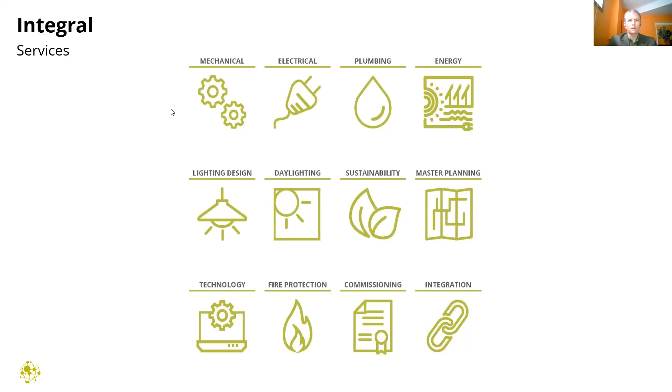In a minute, Bilal's going to share a piece of important research that we uncovered, and there's actually a few hidden messages in this. So I'll put this one up and give you maybe 20-30 seconds to read this next graph and see if any questions arise from this.

So what you'll see from here, this is a good case study. We've got an independent reference, I'm doing my good practice, I've got my scales, my X and Y. And who can spot a problem with this here?

Clearly, they haven't calibrated the number of pirates that are leading to the change in global average temperature. So clearly, this information cannot be trusted. So you all spotted that.

Pirates, yeah. I like to put this one up because I came across this by accident. If you are bored at home and need a break, these are the guys behind the spaghetti monster and the religion called the Pastafarians, isn't it, Bilal? Interesting name. These guys believe that the world was created by the flying spaghetti monster, and as Pastafarians they have the right, as part of their religion, to wear colanders on their heads. So he just put this up as a bit of a spoof.

But the reason I like this one is because when you're trying to promote a green building, you will find a mountain of suppliers telling you that their solution will give you a green building. They say, if you put this pump into your building, it will make it greener, more efficient. You need to be very wary of the data. Sometimes information comes through with no scales on it, sometimes it's not referenced. So it's just a warning that you need to be fairly cynical of the data. Obviously, you want to check you're all awake.

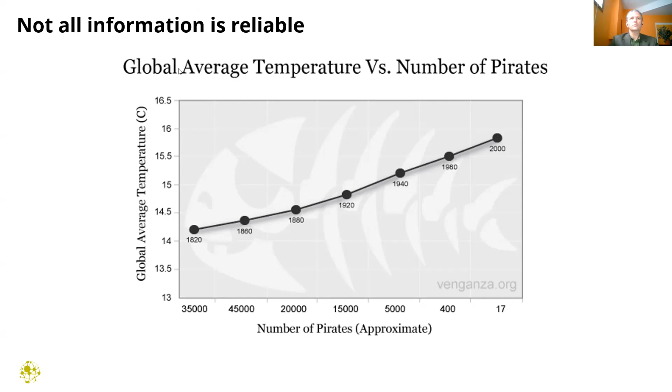Okay, I'll let you just soak this one in for a second. What we wanted to do with this rather busy table is just highlight 3 of the main ways we're seeing of defining net zero. When you're starting out on a net zero project of any type, the first question I'd recommend you ask is, what version of net zero would you like? The 3 we're seeing coming in as most prevalent at the moment in the Alberta market: one is the CaGBC, who have their own zero carbon standard.

And they've just released, I think, Bilal, version 2 - is that correct? That is true, just at the beginning of this year. So there again, if this is what your client says they want, you need to say, okay, well, we're now just into version 2. This is obviously the same people that brought you LEED, and they've done a really good job of presenting something that's pretty clear and very well defined, but also I'd say it's kind of the market-friendly version of net zero.

The 2 things I'll highlight for you are 3 and 4, if you're not familiar with this. Number 3, which is surprising when you first look at it, is it recognizes that you only need to meet this certification as a third-party certification of 5% of the modeled annual energy. There's a version for existing buildings as well. The second one, which is quite a challenging target, is the TEDI. If you're not familiar with TEDI, which I'm sure you are, that's something to wrap your head around. The TEDI target for most of our climate zones is in that 34 to 36 range, so that requires a very significant envelope.

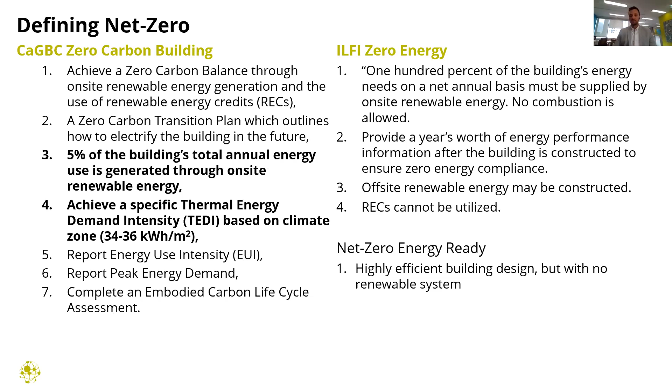So just looking at that, it will really depict where you spend your dollars when you're investing in a net zero building. So just to reiterate what Matt said, I think the designer and the owner should really be on the same page of what's happening and how that rating system should be achieved. I would jump to the next slide here.

Feel free, Matt, to explain that, but I guess we don't want to go into the depths of every single row here. The message is, just like the three different alternatives we showed in the previous slide, there are, across Canada at least, many other frameworks and pathways to different high performance standards, or sometimes authorities having jurisdiction requiring buildings to meet a specific performance, just like the BC Step Code and the Toronto Sustainability Guidelines, etc. So Matt, feel free to add a few words here as well.

Thanks, Bilal. This again is another rather busy slide, but that's really the intention of it. This is from the results of one of the studies we recently did for Alberta Infrastructure on achieving different versions of net zero. There's actually a bigger table with about double the number. Again, the message is make sure you know what your target is. And to reiterate what Bilal said, sometimes the devil is in the detail.

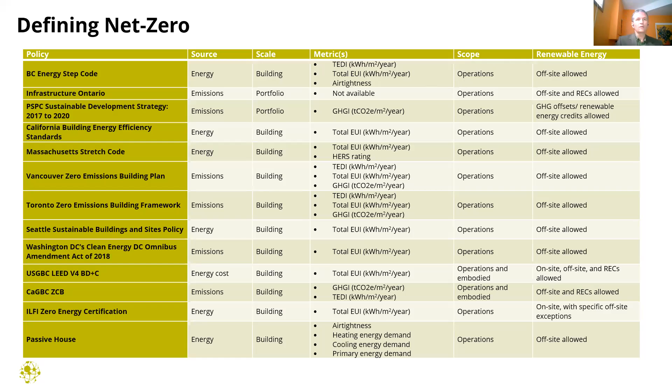What we have on the next slide is a graph produced by the International Panel on Climate Change, showing the potential greenhouse gas emissions reduction by different sector. You don't need to worry too much about the details of the different shades of blue, but a high proportion of people I talk to, even hardened building professionals, are very surprised that the building sector is the biggest—new buildings and existing buildings. So what this is telling us, if you look at this third graph, that's us, all in the building sector.

If we don't do something about our greenhouse gas mitigation potential, nothing else really matters. So if we brought transport down to zero and didn't do anything about buildings, we're going to be hooped. So if you're wondering why you're working so hard to try and deliver net zero buildings, this graph you can grab, we've got the reference there, I can send it to you. This is the graph you use to reassure yourself why you're having sleepless nights trying to deliver net zero buildings, and to reassure clients why it's so important that they do that.

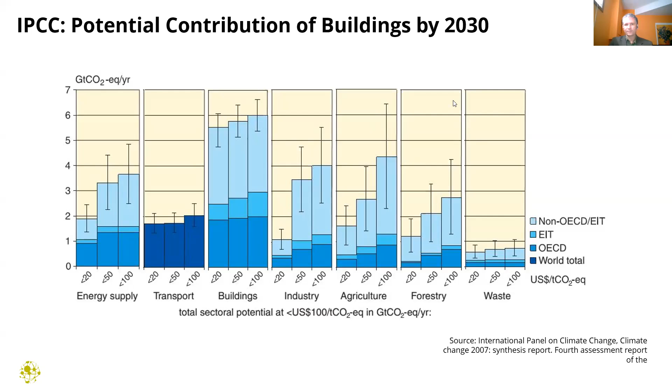I think that was all we had on that one, wasn't it, Bilal? That is true. And this one is a proper graph, no pirates on that one. Okay, off you go, awesome. Bilal. All right, thank you Matt. So no more pirates, promised, it's all serious from this point.

We've kind of defined what net zero is and why we need to achieve this, and the different schemes, or templates, that clients and developers can follow. But really, how do we do that? People are becoming more aware, more educated, but it's always good to remind ourselves of the exact steps to achieve net zero from the design side, or where do you invest your money first.

In any high performance project, even before we speak about net zero, fabric or the building envelope should always come first. And when we talk about building envelope, I would even stress something which is not insulation. Believe it or not, sometimes the shape of the building itself, how you size the mass of the building, how you orient it, and passive features you could add is essentially free money when you're trying to sell a service to a client. If I'm a developer, I would care first about the mass of the building before discussing insulation. So that goes on the left side of my screen right here.

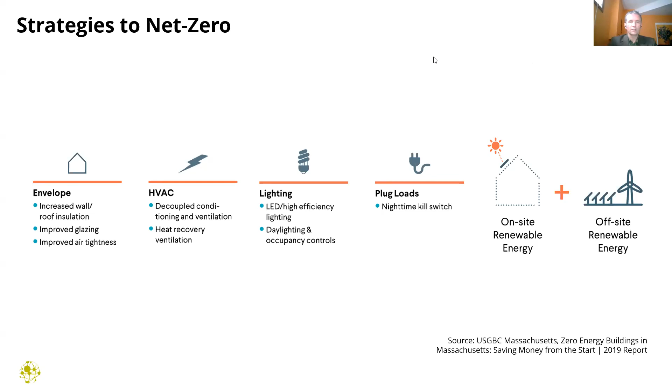One of the key things we're looking at with clients as they're re-entering the workspace is making sure they understand what the ventilation strategy is in each space and what it needs to be. When you're looking at one of the best measures for reducing that, in the second box you see there in terms of HVAC, is recirculation of air and the whole idea of the HRV. If you're the mechanical designer, you really need to be guaranteeing the client that you're not going to have any cross-contamination. So one of the things we're going to touch on is that as you reduce air leakage, you have less opportunity to dilute any potential contaminants or airborne particulates. So that's a really good question - we were going to touch on that later, but thank you.

Appreciate it, Daryl. Yeah, we'll touch on it. The next one, yes then?

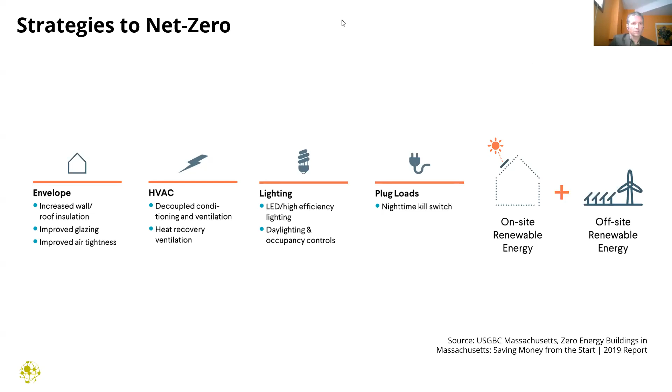I'll carry on and try to make this smooth and quick so we can jump to the other slides. Essentially what we're looking at on screen is a colorful illustration that has a point, and I want all of us to look at this from the left side to the right side. So currently today, at least in Canada, and it's very similar across the globe, there is some sort of building code that needs to be followed.

Part of that building code is an energy section, an energy jurisdiction calling for an energy requirement, or sometimes a jurisdiction calling for complying with LEED. I'm speaking about this across geographies around the world. What I'm trying to say is there is some sort of energy performance target that has to be addressed, or at least discussed, for every design. At least in Canada, we have the NECB 2017 in most provinces today, and 2015 in others.

To achieve this, designers and developers alike are seeing a bit of a change, and that is what we call thermal bridging. Today, thermal bridging design cannot just be a small Excel exercise like we used to do with the older edition of the code. Today we're engaging in much more structured conversations with the architect and sometimes the design-build team, looking at more tangible and actionable solutions to reduce thermal bridging. In case some of us don't know this, thermal bridging is essentially a bypass - if you have a very good envelope with a stud that holds the structure together, that stud is a bridge for heat to transfer from inside to outside, or the other way around, depending if you're in a cold or hot dominant climate.

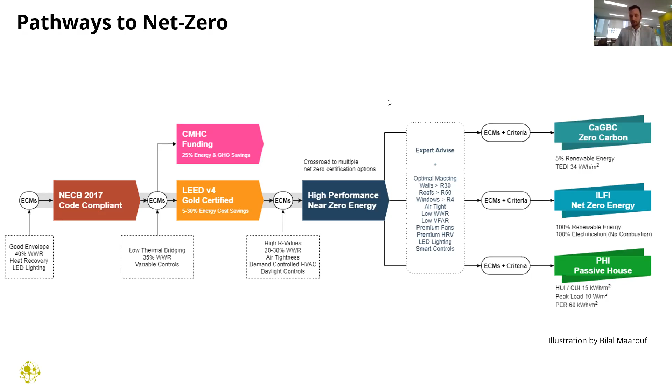I'm happy to take this offline in case anyone is interested to see more details on that, or I'll just wait for questions. I'm going to pause here for a minute in case people are typing.

I will just briefly go over the study we delivered last year. Let me briefly touch on these next two, just to make sure we finish on time and then see if there are any questions at the end, because we covered quite a lot in the last few slides.

All you need to know about this one is that it was a study Bilal did, where we were asked to model how you achieve two of these main different versions of net zero for different building archetypes. We went through and did actual models for all the different climate zones.

I think this is available online through Alberta Infrastructure, so we can circulate it. We won't necessarily go through every detail here, but maybe at the end if there's time. What we found is that we picked and chose different solutions for different building types and locations, and there is assistance out there—I believe it's still available on the Alberta Infrastructure website.

That's quite a big study. We want to show that there are suggested solutions out there, so we can get into the depth on some of the other ones.

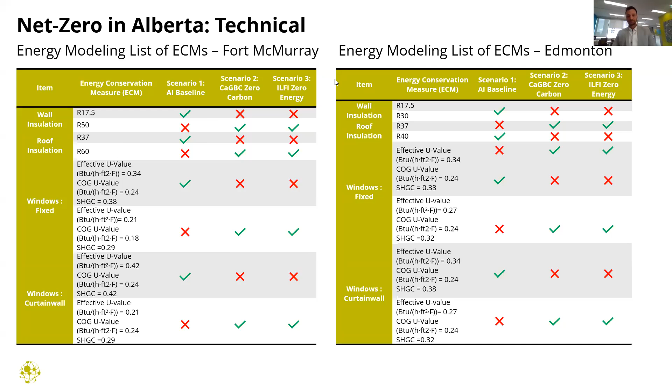Yeah, the next one we just want to illustrate—here's another example of something we did the mechanical, electrical, and energy modeling design on. It's a building in one of the coldest parts of Alberta, and it's Passive House certified—or Passive House Plus, yes, I think it's a Passive House Plus.

And this has achieved all these metrics that we're talking about, usually listed there, and it's really a groundbreaking building that we're very proud of. We can go into the details there.

So just to chip in quickly about the client, the town of Valley View: they were between two decisions. Option A, should we retrofit the building we currently have and make major renovations, or Option B, should we go with a complete new construction that is passive house and reduce our operation costs? When you look at the 30 to 35 year life cycle cost of the building, it made much more sense to pursue passive house. This was decided by the client, and I think it's a very interesting case study for all of us in Alberta to realize.

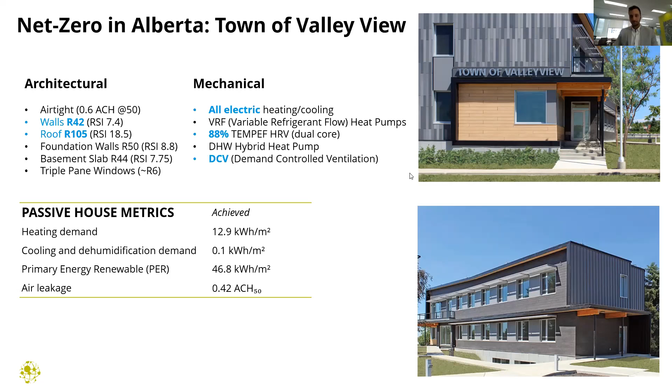But the message we want to convey is passive house doesn't really mean a lot of extra costs. We are looking at cost premiums in the Alberta climate zone, and when I say Alberta climate zone, it's a cold climate zone. Unlike British Columbia, our neighbors, where it might be a bit more cost affordable or have faster return on investment, in Alberta we're looking at a cost premium between 5 to 10%. And this can really be subjective based on the type of building, as Matt explained - is it residential, institutional, commercial - and what type of rating system you're pursuing, and what the financial model is. Is there financing happening, and is there something that could get economies of scale?

Payback period is about 20 to 25 years. So owners would need to know, are they owning the building across its life cycle, or are they selling it after 10 years? These are all the accounting and financial questions that need to be asked before we formulate the full business case of passive house. So I just want to end it there for courtesy of time, but we can address questions even offline after that.

2020, Matt? Did we skip the more detailed slide for the case study? Was there a slide before that last one? Yeah, that one. Did we skip that one? We did skip it, I think this one's in lieu of the other. I think this one's worth having a quick chat about. Did you want to talk about this one, or shall I?

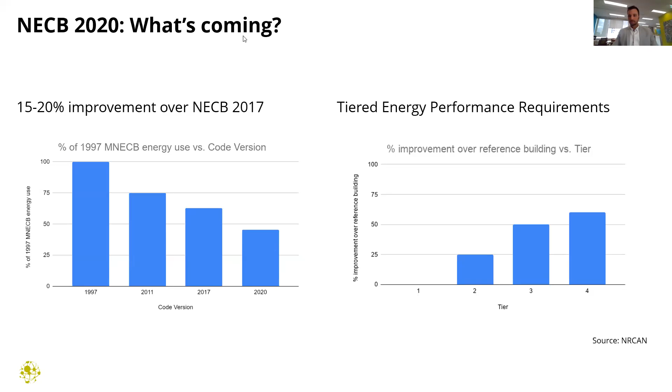So the focus on the air barrier and air tightness for the first time has been introduced to the energy modeling performance pathway. I really wanted to end here, unless you want to add any thoughts, Matt. I really wanted to do the next slide because that one kind of blew my mind. But let's ask, I just typed quickly back to Ursula's question.

So geo-exchange, or ground source heat pumps, are a really nice technology. They're fairly simple, and you could get different types. You can get air source heat pumps, which have a challenge in our winter. You can get vertical bores, or slinky type boards which go more horizontal, and they can be a great part of a solution.

Going back to my thing with the pirates and people saying well, if you put this in the building, it's going to make it greener - we like to model the building as a whole system. So I'm always looking at what's the next best alternative. If you're going to go for an all-electric building, ground source heat pumps are going to be right up there as a really good choice. What's interesting is looking at the timeline, and this comes back to defining what the client wants to do.

If you were to just do a straight swap right now for ground source heat pumps, the COP, the coefficient of performance of the heat pumps, is fairly much about the same number as how much CO2 is emitted from 1 kilowatt hour of Alberta's grid electricity compared to 1 kilowatt hour of heating from natural gas. So right now, at this moment in time, it doesn't get you much further in terms of your overall CO2 emissions for the building, but it puts you in that position to be an all-electric building and have fewer local emissions. So hopefully that answers the question okay.

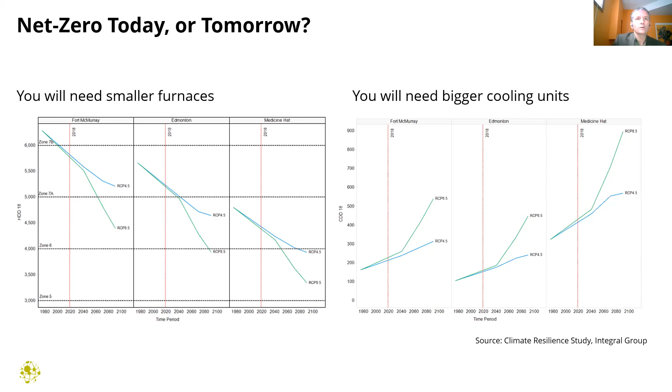So I did want to do that one, and then whether you put up the last, let's do this one, because we had a great question about this one here. Did you want to talk through this one? And then we got a couple of great questions.

Very briefly, everyone, the last two slides kind of zoom out outside our discussion to look into the nexus into climate change. How does your net zero building operate in the next 30 years, as well as the escalation in utility rates, which was not in the slides, but the cost of energy is probably going to escalate in the next 10, 20, and 30 years. So when you're calculating your investment or return on investment, you have to capture the life cycle and not just next year's.

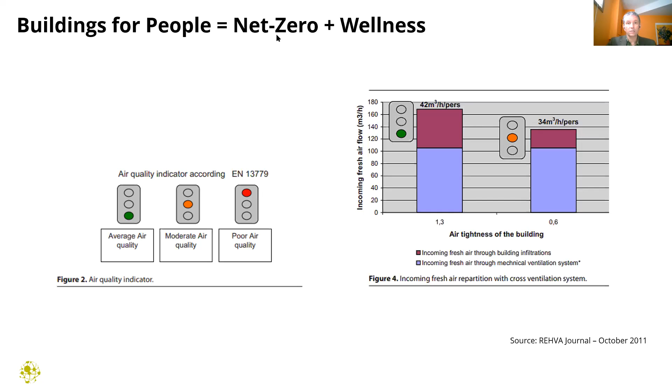David has asked: how limiting is the current carbon intensity of Alberta's energy grid to achieving net zero building design? Is renewable energy procurement a large or manageable obstacle?

I do love that question. There's a fantastic book called Sustainable Energy – Without the Hot Air, free online, which leads to the conclusion that the way to deal with everything is electrification of everything, and then we can deal with the grid. We are gradually phasing out coal in Alberta and moving towards a cleaner grid. There have been a couple of big examples of quite large PV arrays being installed, many megawatts. So we've got two options. One is to proceed on the basis that the grid is going to get greener, and move down electrification on the basis that that's going to happen and continue to happen. The other is to say let's assume we're not going to clean up our grid, and maybe it actually gets dirtier, so let's look at our buildings as net zero on their own. Either way, by reducing the loads and making the building envelopes better and the systems better, we're going to contribute towards that. One school of thought is to just concentrate on primary energy, since you can't affect as an individual project what's happening on the grid, so just make your building as good as you can. Hopefully that answers your question.